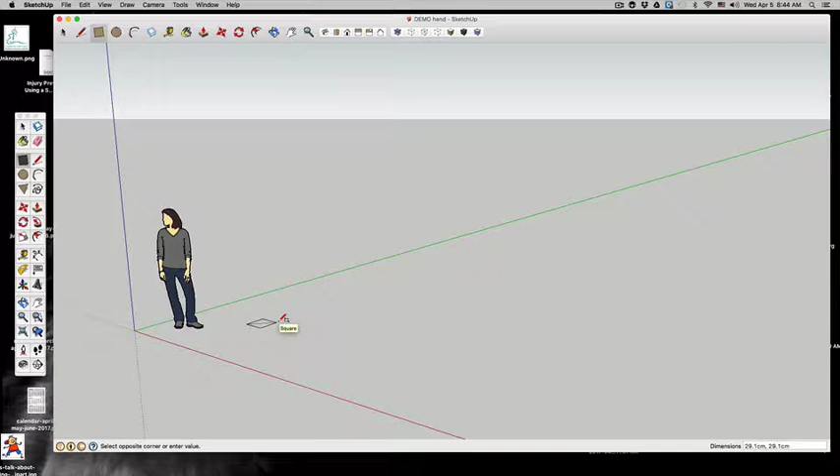I'm going to start with a rectangle. Simply click on the ground and draw, and in the bottom right-hand corner type in the dimensions I want this rectangle to be - 6 by 6. I already have this set to be centimeters. If your drawing isn't set to centimeters, go to Window, choose Model Info, click on the Units tab, and set the length of the units to centimeters. So I have a 6 centimeter by 6 centimeter box, and I'm going to zoom in on it here.

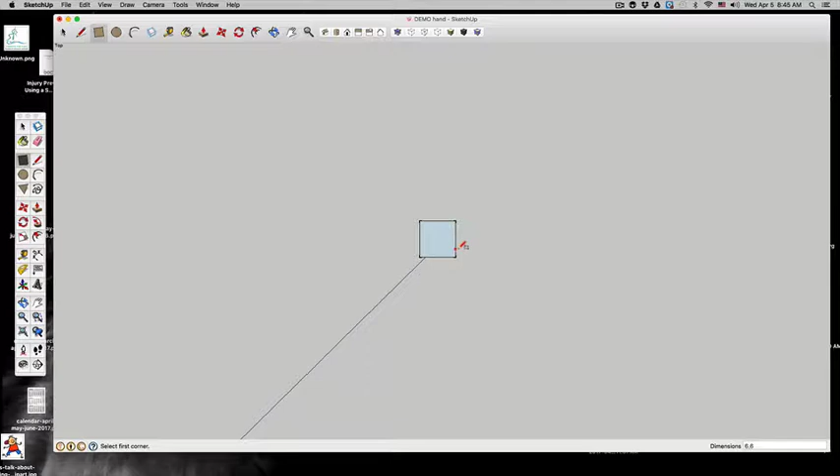This is essentially going to be a very simplified palm of my hand. Now I want to give it some thickness, and I want this box to be hollow, so I'm going to use my push-pull tool and pull this up a certain distance. I'll go down in the bottom right-hand corner and type in 0.3, which gives me 3 millimeters. So my base is going to be 3 millimeters thick.

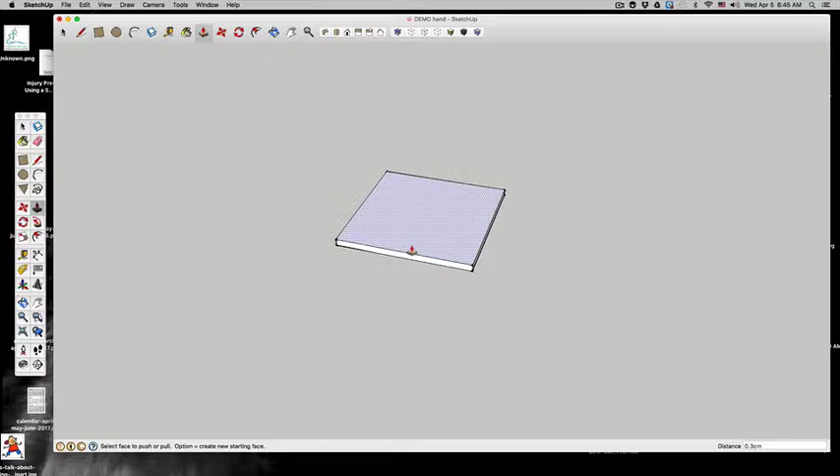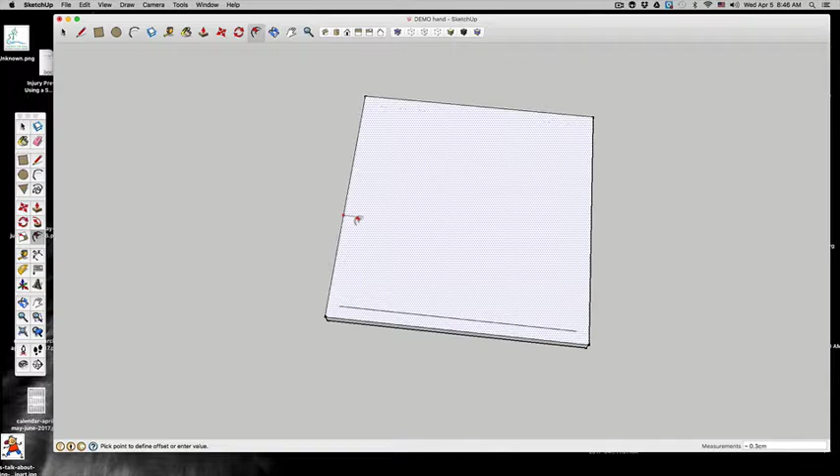Now back to my top view, I'm going to use my offset tool and draw in from the edge. Depending on your view, sometimes that doesn't show up, so I'll zoom in a little more. I'm just going to undo what I did there. So again, I have my rectangle, my square, and I'm going to come in from the edge. Then I'll push-pull this up to a height of 2 centimeters. Since I've already pushed it up 0.3 centimeters, I need to push it up another 1.7 - you'll notice in the bottom right-hand corner I've typed in 1.7 and enter. So there I have my box.

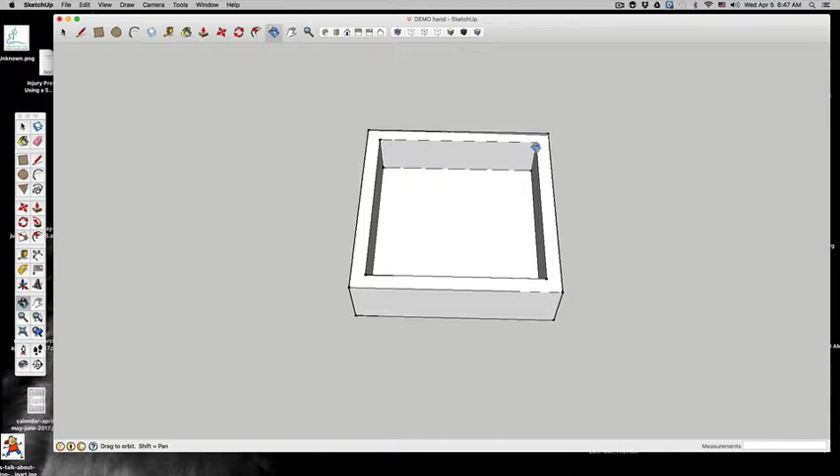I want my box to be hollow because I want to see the structure going on in there, and I also want to be able to put the strings or cords through that will activate my fingers. So there's a very simplified version. If you want to follow something similar but fancy up your bottom shape instead of using a simple square, you can do that.

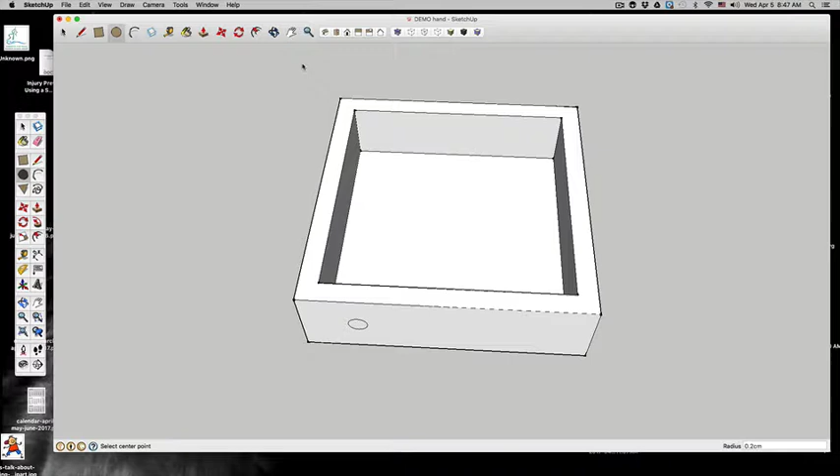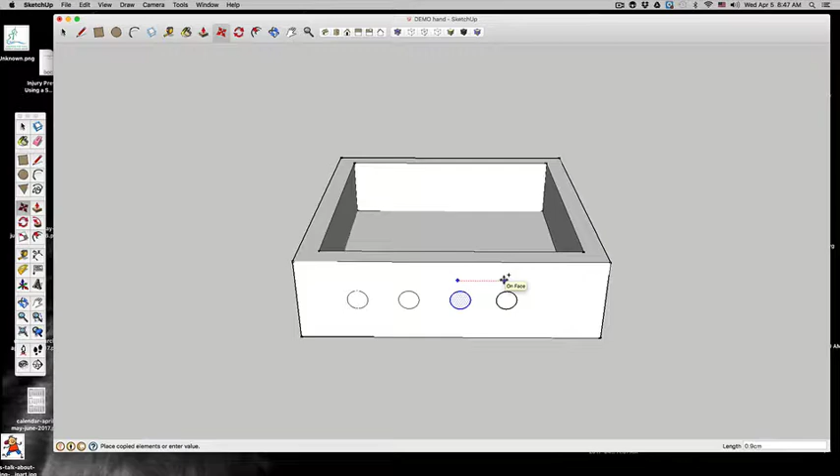Now I'm going to put some holes for the strings to run through so that when I pull and activate, I can actually move the fingers. I'll start with a circle, and I don't want this circle to be very big because I'm just running a string through it. I'm going to spin around to the front view, click on my circle, and use my move tool, but as I move it I'll hold down the Option key - you'll see that leaves one circle behind. Now I need 5 of these: four fingers and a thumb.

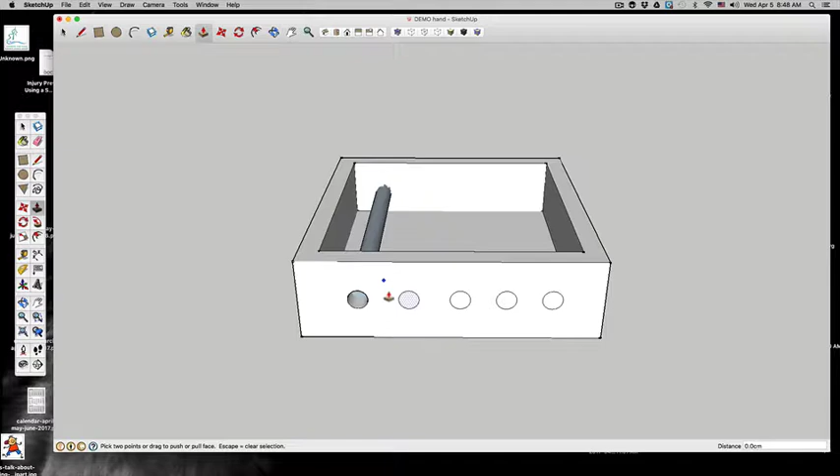Now I'm going to click on that and push-pull that circle forward, and I'll also push-pull a version of it all the way back - see where it says 'on edge'? That means it's touching the far wall. That's going to allow me to pull out the interior of this circle and the interior of that circle, and these will be lined up perfectly. So I'm going to do that same thing all the way along here: click on the circle, pull it all the way back until it says on edge.

On edge. Now I'm not going to pull this one all the way through because this one's for the thumb. So I'm going to spin this around.

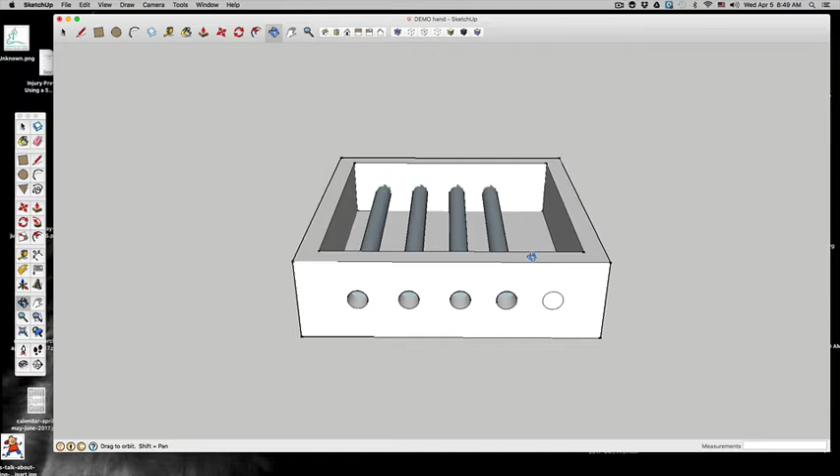I'm going to draw another little circle right here, and this is where the thumb will attach. But I am going to push this one all the way through this wall.

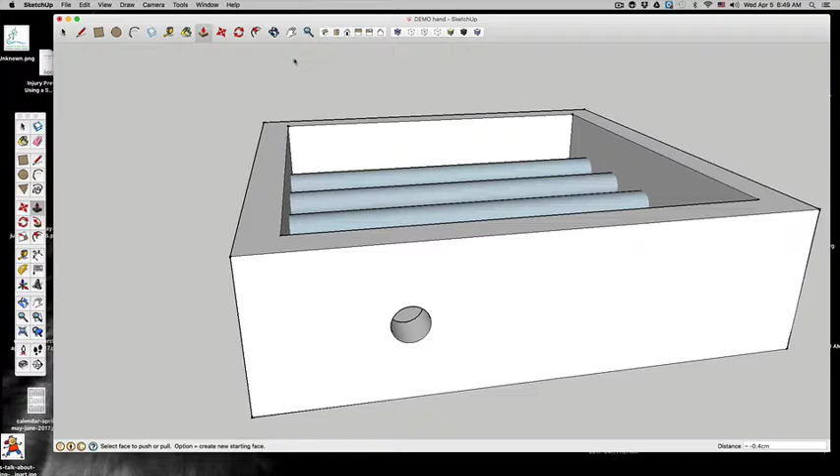So push, pull, and touch on edge, and then you should see, as I look in, you can see right into the interior of the box. I'm going to do the same thing with this one right here. Just push, pull it through this first surface. There we go, and you'll see that my thumb hole then, and there's my other thumb hole over there.

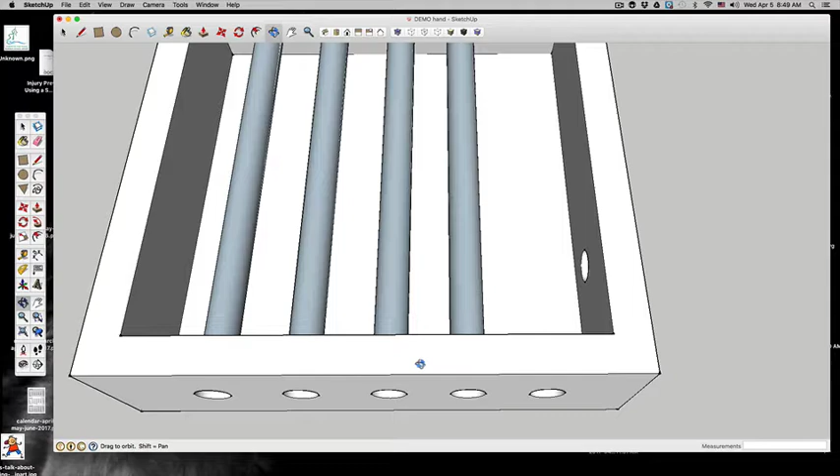Now the finger holes I need to do something a little bit different with. Because I wanted them to be lined up, I'm going to have to use a trick called Intersect Faces with Model. So I'm highlighting the whole object, and I'm going to choose Edit, Intersect Faces with Model.

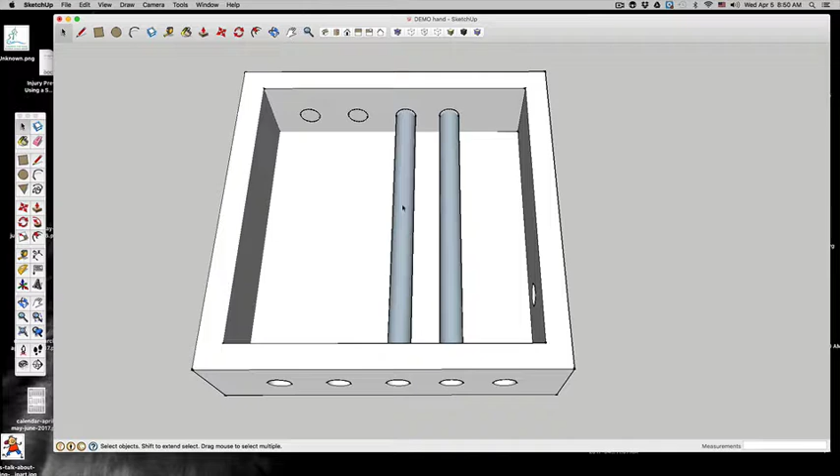And what that will allow me to do is click on these tubes and get rid of them, and it will also allow me to click on this surface and delete it. Delete that one there. And click on this surface and get rid of it.

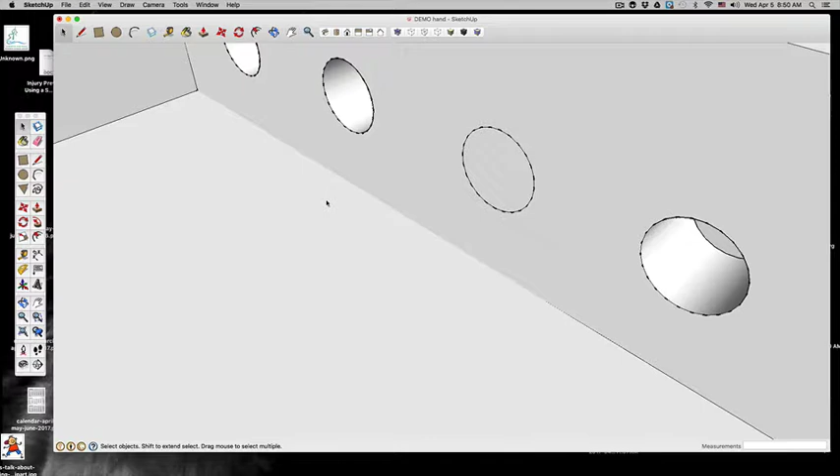So there you see now. Now this one's giving me some grief. I'm not sure why it skipped that part there, but I'm just going to connect that, and then I'm going to delete that little piece right there. There we go.

So now I have 4 holes that are aligned with each other that will allow for finger movement, and then I have a hole here for the cord for my thumb movement. So that's pretty much it for the palm of the hand.

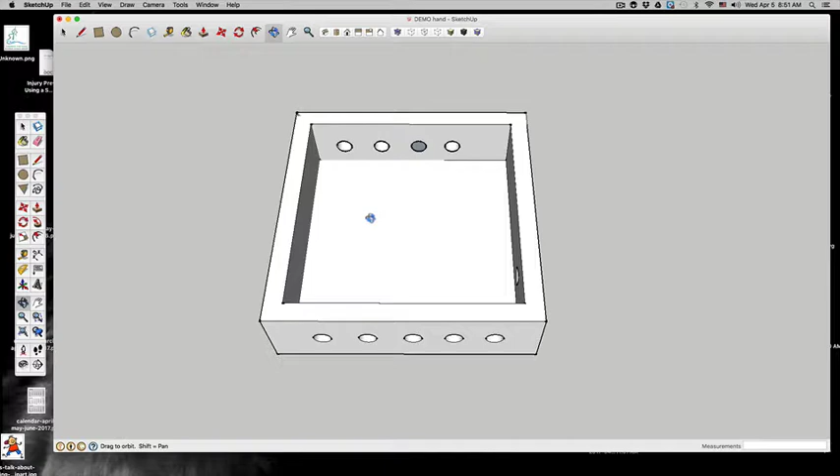So what I'm going to do now is move up to the top part, and I'm going to draw some finger components. Again, I'm going to keep this really simple. I'm going to start with a square shape. I'm not really looking at any dimensions here, but I'm drawing it just a reasonable size to accommodate my finger.

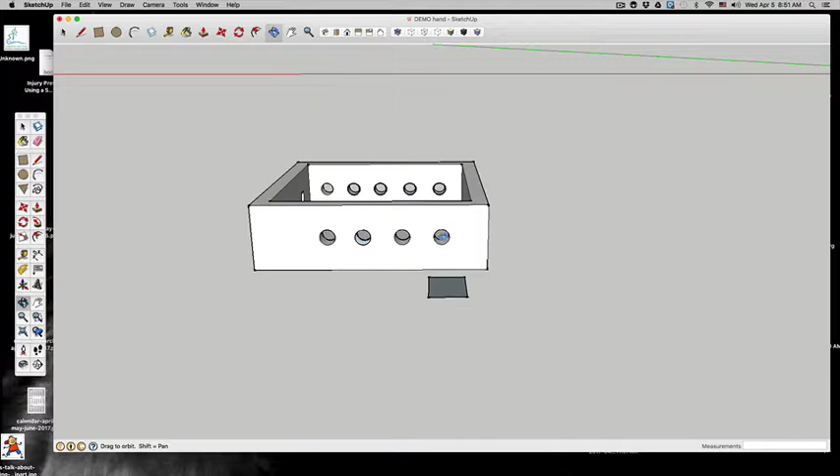I'm going to pull it up, give it some height. I'm just going to use a comparison of the height of the hand to match the finger. I'm having this a little bit shorter. I'm just going to see how that's going to turn out.

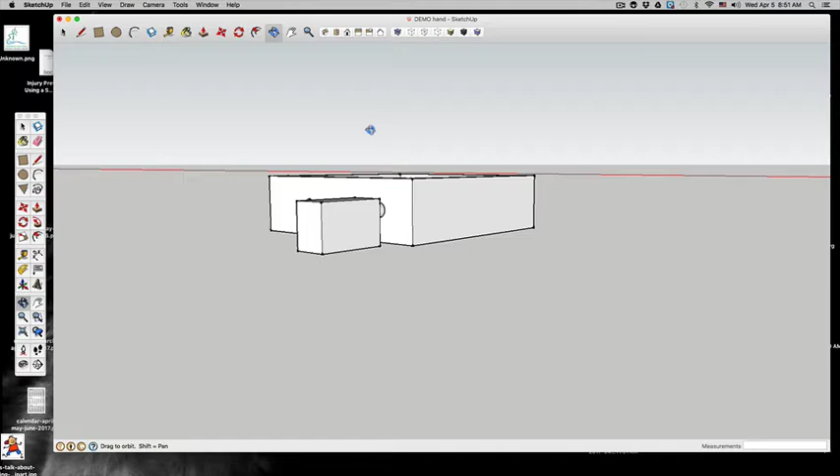So what I want to do here is make this just a little bit longer. So this is going to be the first part of my digit, but I want it to be able to flex forward. So the finger has to be able to bend like this, and with squares that's not going to happen. So I need to take that little end piece right there, and I need to move it in to give me an angle to allow for flexion, and I need to do that at both ends of this object.

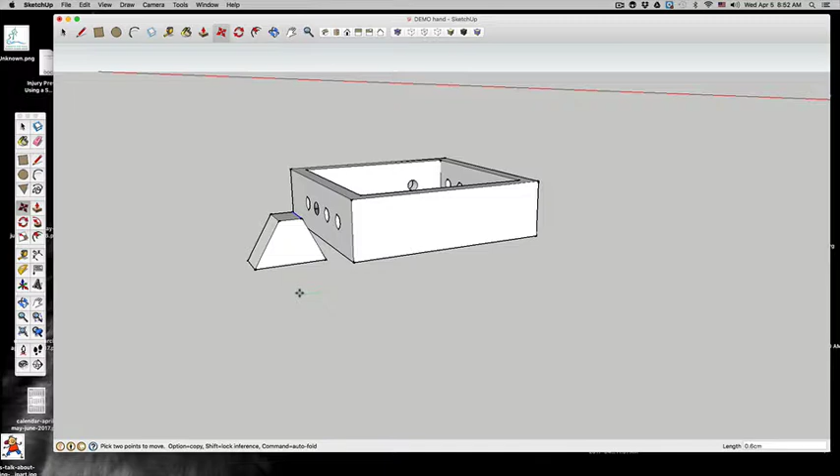Move tool, slide it in. Sorry, I missed that again. There's my end piece, there's my move tool, and slide it in to match the other side. So I'm going to look at it, looks pretty good.

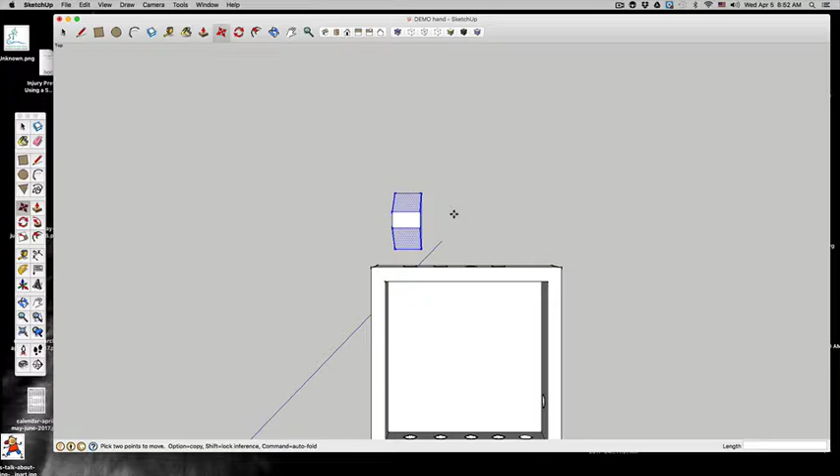I'm going to jump back to my top view, and I am going to duplicate this 2 more times. So I'm going to highlight it, and again, I'm in my top view, and that's important because when I do move, I'm going to hold down the Option key. You'll notice that my cursor is making a green line, so that means I'm moving on the green axis, just moving it directly up from where the first one was. So there are my fingers. I'm going to now do one more thing similar to what we did before in cutting out the tube.

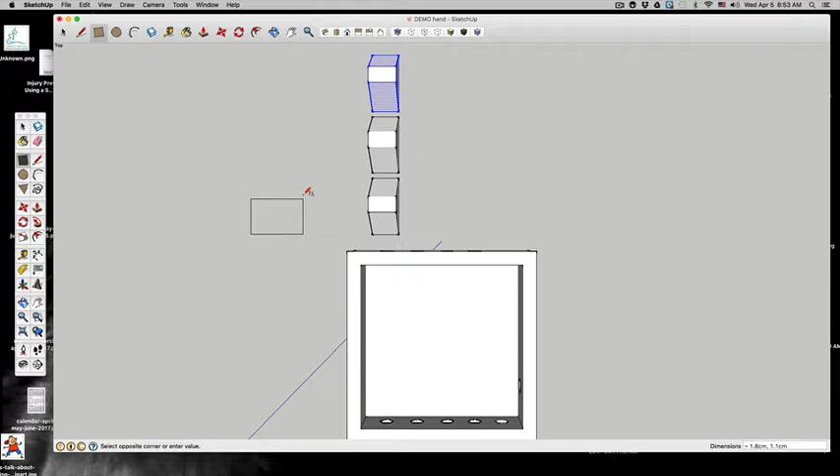So I like to start with a square. I'm going to push-pull that up into 3 dimensions, and the reason I'm doing that is so I now have a nice vertical surface here on which to draw. This will make sense in just a second when you see what I'm going to do.

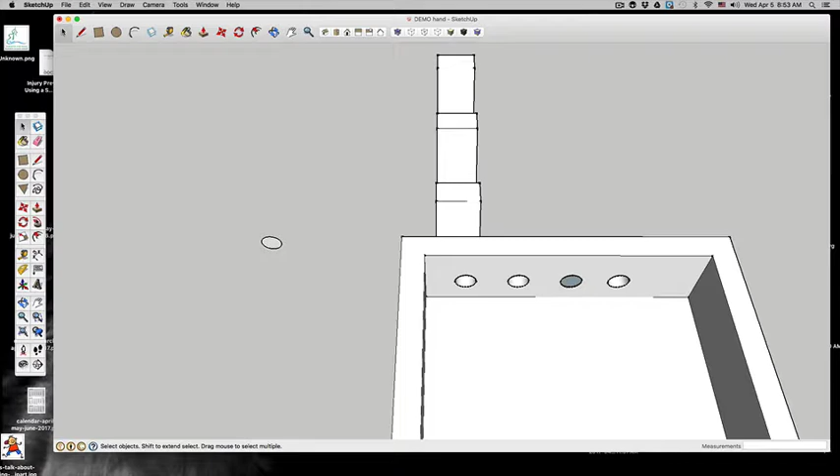So I'm going to create a circle, and now I'm going to erase everything that's in my initial rectangle. Then I'm going to push-pull my circle into a tube or cylinder, because now I can take that cylinder and slide it right into the objects here, and do Intersect Faces with Model again to cut a hole through this.

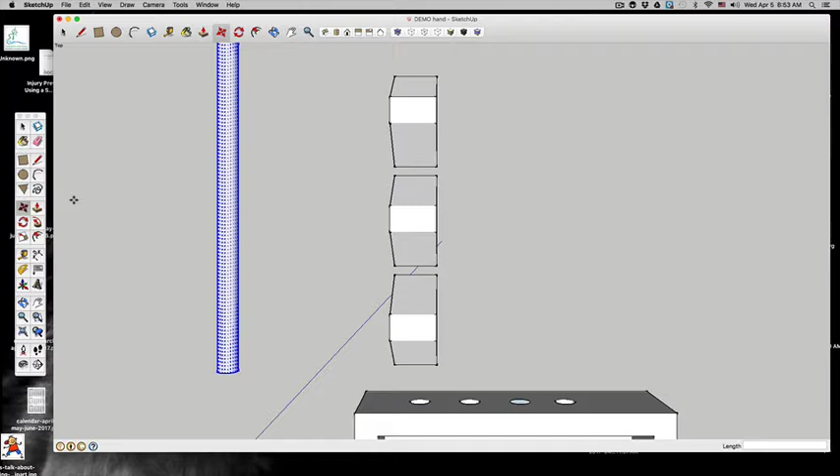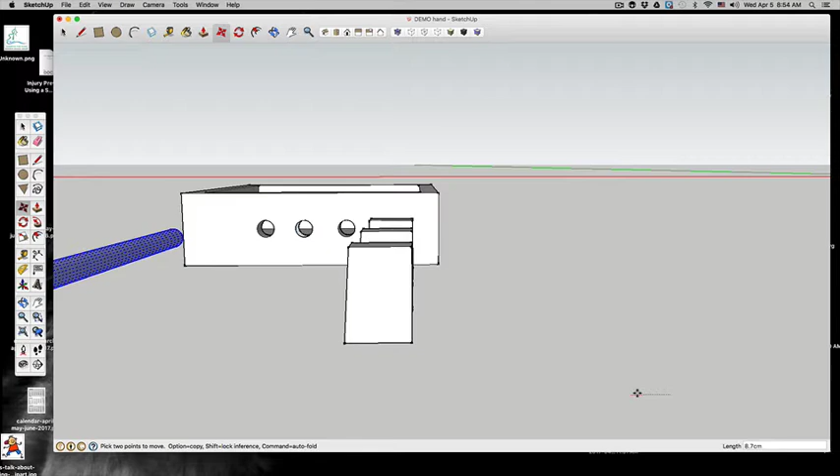So there we have my circle, and I'm going to slide this right over. Now it's not quite centered, so I'm going to see if I can just move it back in and get it centered a little better. Oh, that seems to be snapping.

So that's one of the issues you get when you draw things really small—sometimes it's hard to get things positioned right where you want them. But that's not going to affect my hand in any way, shape, or form.

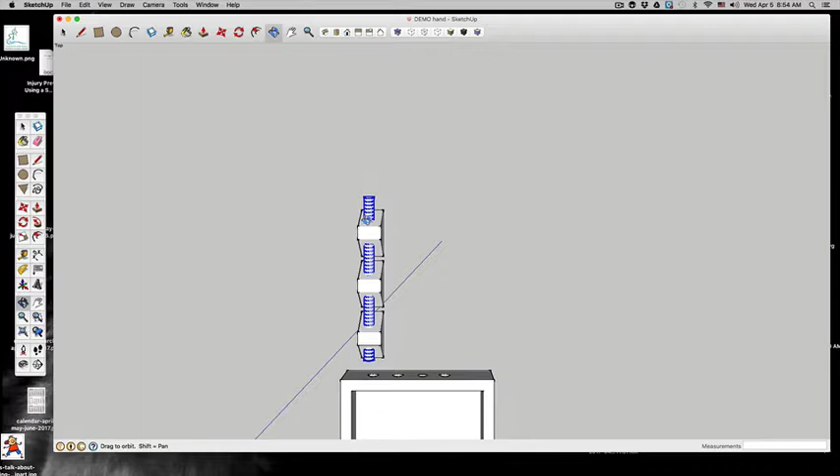So I'm going to go back to my top view, zoom back out, and now I'm going to intersect faces with model once more. Highlight all of it, edit, intersect faces with model, and now I can do the same procedure where I'm going to get rid of the tube.

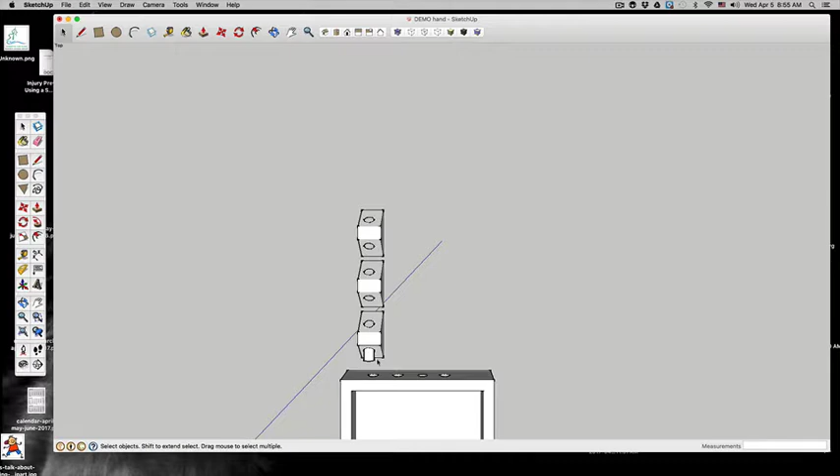I should be able to zoom in a little bit and get rid of these pieces, and then get rid of these pieces, and that again should leave me with a hole cut through my finger components. So let's see if we have our hole, and we do.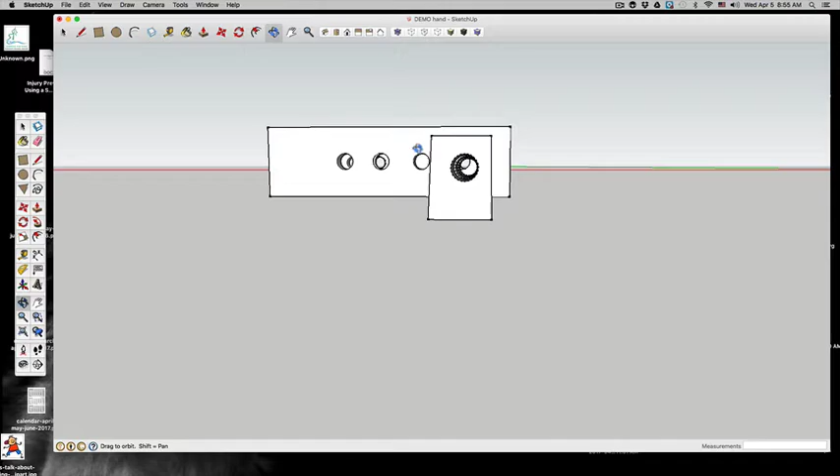Perfect. All right, so the last thing I'm going to do is duplicate some of those components. So I have my fingers—there's one finger.

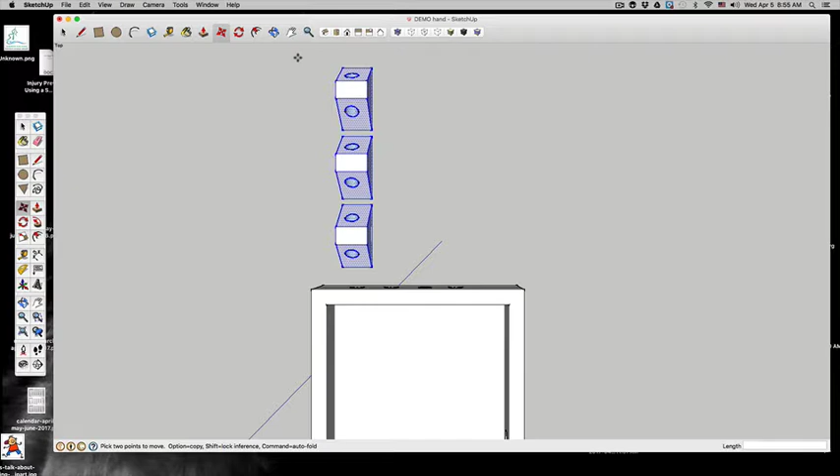I'm going to take my move tool again and hold down Option while I make my move. Notice my cursor isn't on my objects—once they're selected, I'm moving out to open space so that I'm not actually snapping to any other objects or features on my screen. So there's my second finger, my third finger, my fourth finger.

And I'm going to make one more, move it over here, delete and rotate, and this is going to be my thumb. The thumb only has 2 segments instead of 3, so I'm going to rotate this.

Oh, I deleted one too many there. Delete one, I have 2, so I'll highlight those and rotate them to represent my thumb. Again, to keep it simple, I'm just going to rotate it 90 degrees. You can be a little more precise in your version.

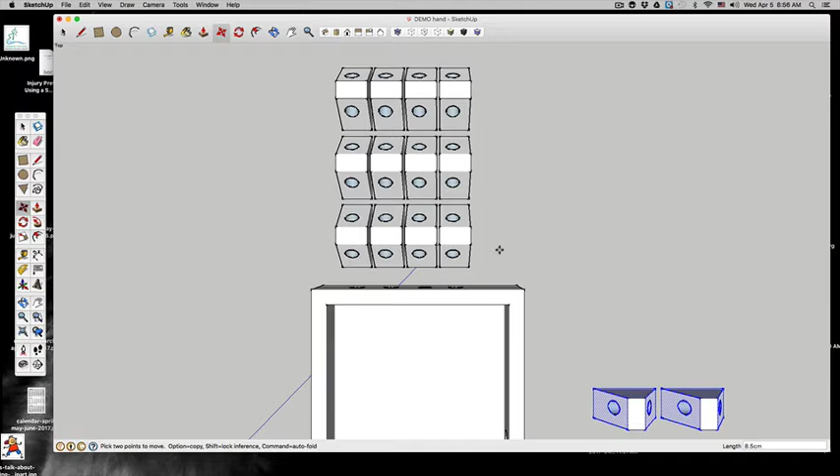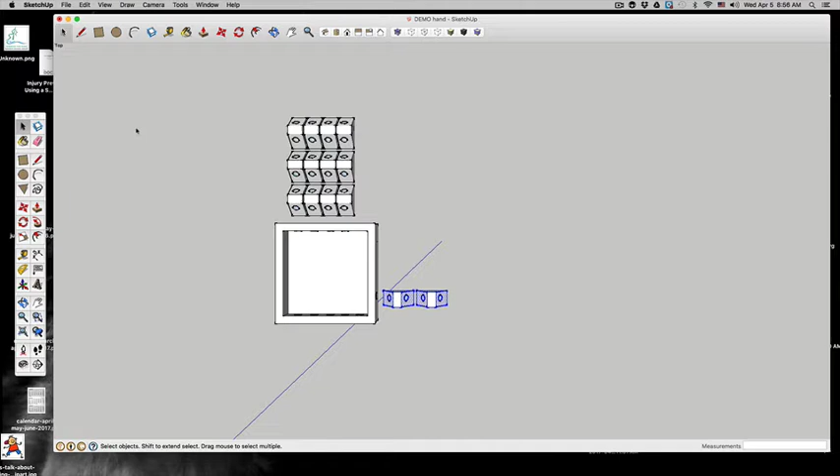It really doesn't have to be positioned in the right place because we're printing it and we're going to attach them afterwards. I just want to give you an idea of what the hand is going to look like—so there is a very simplified version of my 3D hand.

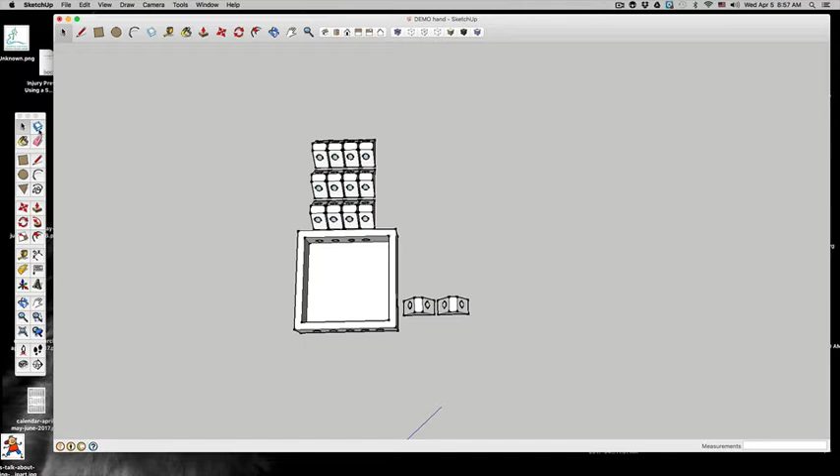My Arduino motors will be sitting down in this area, pulling on strings that are going to go all the way through and attach here. So then we will get flexion of the fingers, and then my thumb will come through here and we'll get flexion of the thumb. Pretty simple, pretty straightforward.

We don't want to make it too complicated, and we don't want to make it too big because our printer does take a while to print. This drawing itself, I imagine, would probably take about 3 to 4 hours to print. So again, we don't want to make it too big and complicated, otherwise we'll be at this forever.

So there you have your drawing. In order to make this now printable, you need to save it, and bring it or put it in the common drive and let Mr. Kempton open it up on his computer, and he will export it as an STL model. That format allows the MakerBot printer next door in room 154 to read the file and print your 3-dimensional creation.